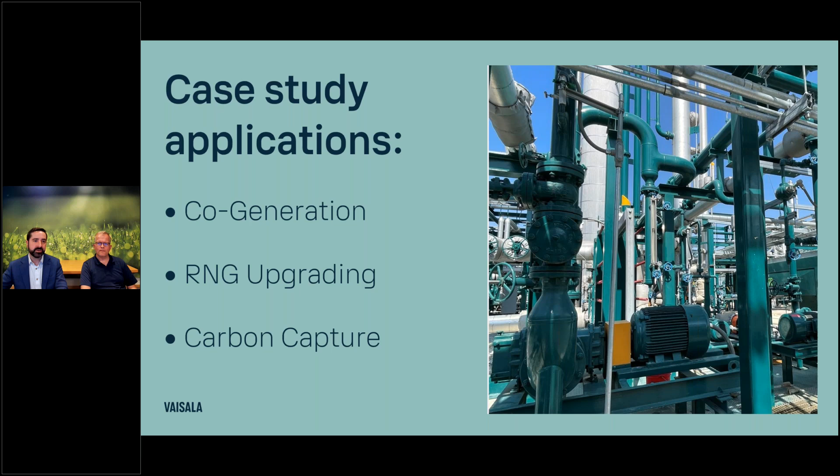But before we get into that, I'd like to introduce Vaisala for some of you who are a little less familiar with us. We began in weather measurement over 85 years ago, and about 50 years ago, we developed the first polymer humidity sensor. Since then, we've been adapting these sensor technologies to a variety of industrial applications, from life science, museum art preservation, HVAC, and we've even been the technology chosen by NASA to help find water on Mars with our low dew point technology. We consistently invest over 10% of all of our revenue in R&D each year to continue to develop products to serve this wide variety of industries, to help protect products, improve processes, and protect personal safety. So next, please.

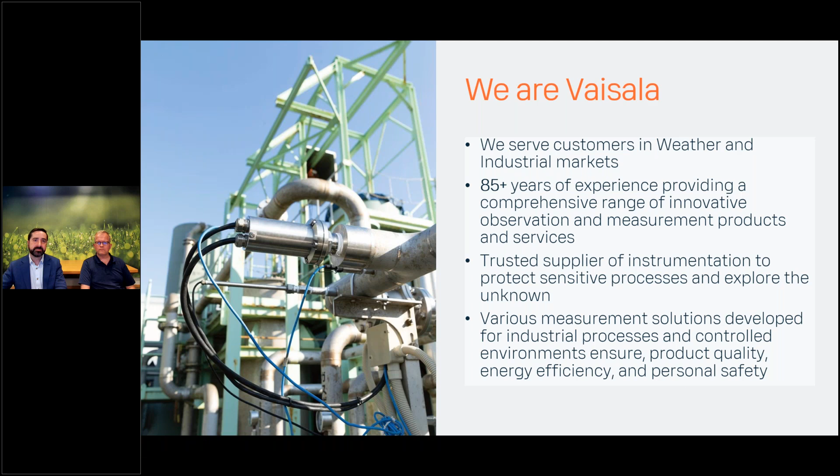And then just a little bit more about ourselves. So I'm an application engineer working in business development for, like I said, the biogas, RNG, and carbon capture applications for Vaisala. Later this month will be my 10-year anniversary with the company, so I'm very proud to be here. My background includes an engineering degree and over 20 years of electrochemical measurement technology experience from a variety of different companies, from other sensor manufacturers to the public sector, working with the EPA. And then I'll let my colleague Antti here introduce himself as well.

Good morning. My name is Antti Heikkilä. I am the product manager at Vaisala for our multi-gas probes product line. That is those infrared probes that we use for monitoring other gases than carbon dioxide. Carbon dioxide is currently the backbone alongside humidity of Vaisala's product range, but all the other instruments, methane included, are in my portfolio. My background is in infrared spectroscopy. I used to work with another company doing mostly emissions monitoring with FTIR technology, and as part of that I have been contributing to different international standards and ASTM test method revision for FTIR spectroscopy and NDIR, such as CO2 standard reference method documents.

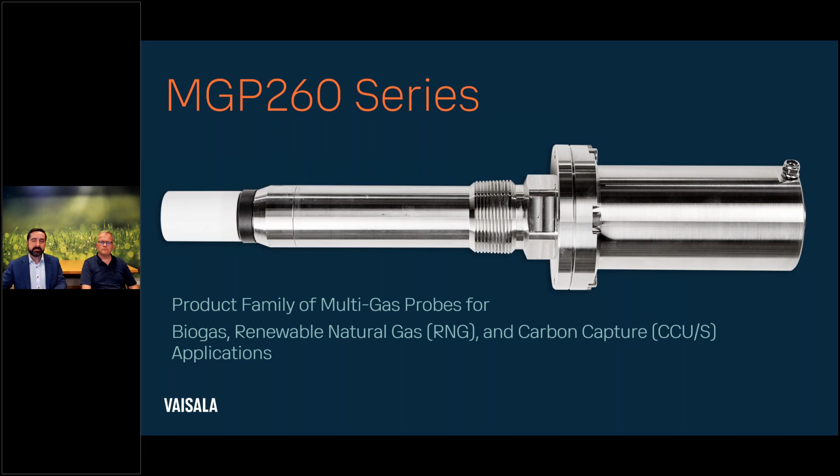The series consists of two models, the MGP 261 and the MGP 262. The 261 being the full-featured, full range for all three parameters that we offer with this probe, with high accuracy and the ranges that are typical for anaerobic digesters and some landfill gas operations. The MGP 262 is a high accuracy, low level methane analyzer combined with a full range CO2 sensor with high accuracy at the higher range for the CO2 measurement. Again, very highly accurate and self-contained.

They are rated Class 1 Div 2 for the United States and ATEX Zone 0 for the European and other markets. They contain three 4 to 20 milliamp loop-powered outputs and Modbus RTU communications, as well as an isolated EX-rated input for a pressure sensor or a temperature sensor, should you choose. Next slide, please.

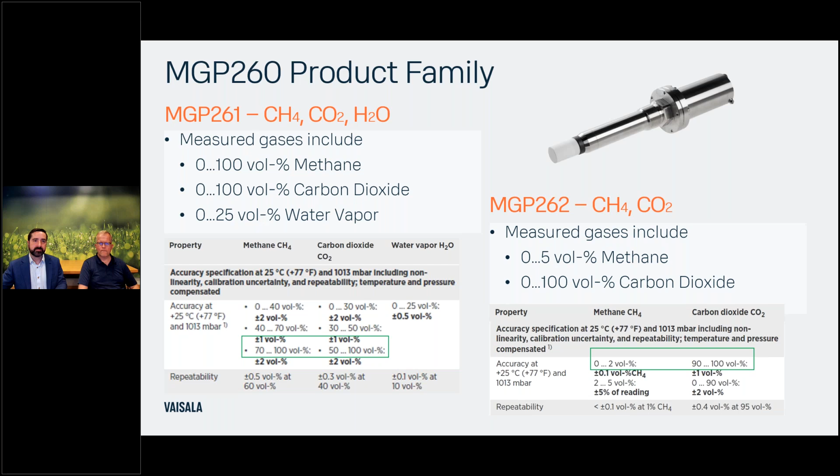The way they work is with our patented CarboCap technology. This is a version of an NDIR sensor that we develop and manufacture here in our own clean rooms. Clean room I actually took a tour of this morning. So very impressive operation here.

What sets these sensors apart from traditional NDIR sensors are two main factors. The first is the light source that we use, which does not dim over time like a traditional NDIR sensor filament bulb would. So the filament bulb dimming is one of the main reasons for drift in an NDIR sensor, and we've all but eliminated the need for frequent calibrations to eliminate the drift from that light source.

The second main thing is the detector itself that we've chosen to use, which is a miniaturized form of a scanning spectrometer. It's a very impressive little piece of technology that scans between the measurement absorption wavelengths of the three gases that we're measuring, as well as a non-absorption wavelength. So effectively creating a zero calibration every 8 seconds within the probe. This eliminates the need for attempting to introduce ambient air into the sensor to kind of assume a zero calibration.

And the sensor elements themselves are protected by a sapphire glass, which makes these highly resistant to most contaminants, and they have been tested with exposure to high levels of H2S with no degrading effects. Yes, we did an accelerated testing with 1 volume %, 10,000 ppm hydrogen sulfide in saturated humidity for 1 year, didn't see any degradation whatsoever. So one can then infer that it would last for at least 10 years in the presence of 1,000 ppm hydrogen sulfide.

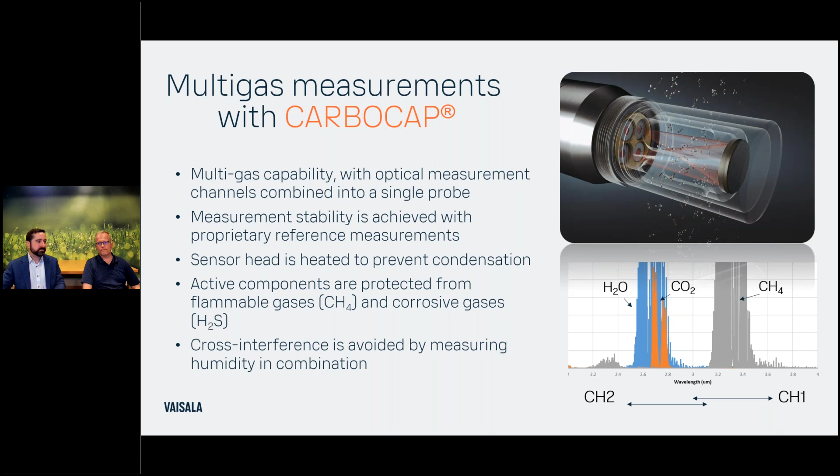So just again, highlighting some of the applications that these probes were designed for: anaerobic digesters, landfill gas upgrading, pre and post treatment. Like Antti said, they're designed to measure in wet gas, so straight off the digester, right out of the landfill. These are very robust instruments that can measure directly inside the process. Combined heat and power engines very much benefit from the fast response time and real-time methane measurement, which we'll talk about in one of these case studies.

And RNG upgrading. The 262 is a very good tail gas monitor, which we'll mention as well. And then in carbon capture applications, measuring in situ, good for point source and direct air capture systems in multiple locations, either in the emission stack themselves or in the captured CO2 streams. They're very versatile, easy to use and integrate into some of these systems, both in research lab grade, as well as some of the pilot plants and scaled up versions that we're starting to see.

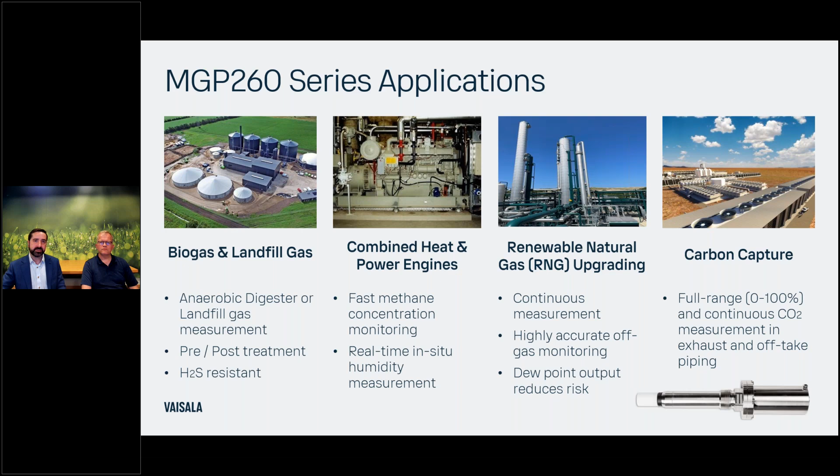So jumping right into the case studies, we're going to begin with one of our earlier cases, which comes to us from our friends in Japan at JFE Environment Technology. This is at the Miura Biomass Center, where they are composting a lot of agricultural and food waste and converting that into biogas to fuel a combined heat and power engine. And so Antti was involved in the development of that project.

And so one of the first questions would be just, what were some of JFE's primary concerns and how did we address those? Their main concern was that they had observed seasonal variation in their methane concentration in the biogas. They are using basically daikon radish as their feedstock. So right after harvest, September, they have a sugar-rich, high methane potential feedstock. And then as winter progresses, the quality of the feedstock goes down.

And at the same time, when it's colder, this is in an exposed location next to the sea, south of Tokyo, they saw a decrease in their methane concentration, increase in their CO2 concentrations, and they had to adjust engines accordingly. And the problem was that when they didn't have an instrument that would give them continuous readings, they were relying on manual testing. So a technician was taking samples with a portable NDIR like once per week, and they were not satisfied with that sampling frequency.

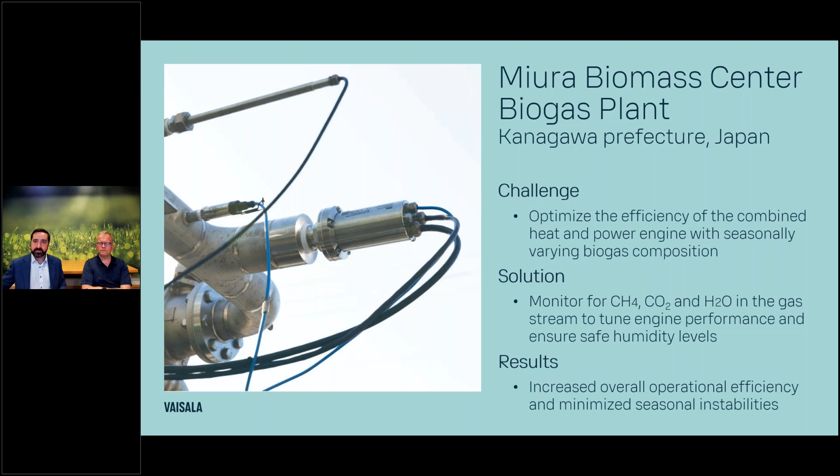Now, that said, we do have a flow-through chamber accessory. So you put the probe into there, and then you have 1/4-inch, say, stainless sampling tubes that you can run as an inlet and an outlet. So we can facilitate remote installations as well. But all right, let's move on to the next case, please.

Which is biogas upgrading, and this is a name that most of you will probably recognize. Pentair is the manufacturer and supplier of RNG upgrading systems that you can install at these plants. And this case comes from the Netherlands at the Sustainable Fuel Plant in Zeeland. And I'll just ask for the next slide too before I forget. So here, Antti, if you would give us a little overview of their type of system and what they needed in terms of measurement from us.

Pentair offer a membrane system for upgrading biogas into RNG. It's a two-stage membrane setup, and they needed instruments for measuring both the incoming biogas and then tail gas, which is mainly CO2. They can also have instruments for measuring calorific value or BTU meters at the point where they transfer RNG into the national grid, but they wanted to control the process better by having online instruments also in the incoming gas stream and in the off-gas stream.

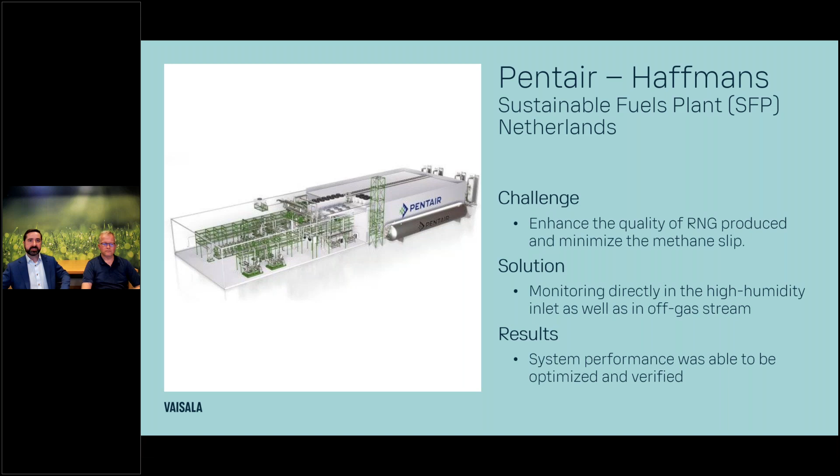So bridging the gap between anaerobic digestion and upgrading systems can be test units. Our distributor in the UK, Bohr Limited, has developed a portable sampling system, essentially, for a probe that doesn't require any sampling systems. That said, it just expands the range of possible applications for this type of sensor, and opens up the possibility for other operations to test it out, see what benefits online continuous quality measurement can have for their operations.

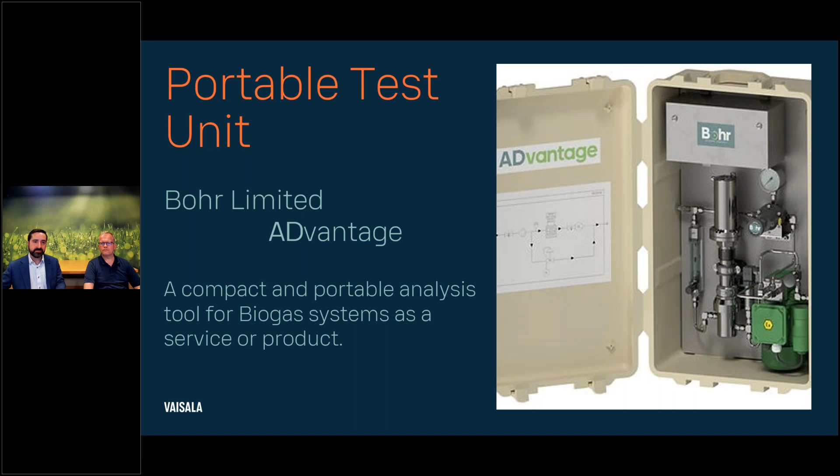So yeah, I said this was for the UK, but let's go to the next slide, and I'll have Antti describe the motivation from Bohr behind this product and how things are going.

Yeah. Well, I see this Advantage product as essentially a commissioning tool for anaerobic digestion plants and CHP engines. While there are plenty of portable options for doing spot tests, the reason for engineering something like this is that you can leave this running on the site for, say, 3 days or a week, just like it was an in situ continuous monitoring probe, but you don't need those 1.5 inch sampling ports for inserting a probe. You can just take the gas from a 1/4 inch fitting that's typically readily available, and the data is stored inside the Advantage system in its internal data logger.

It can also put that data, for instance, into Bohr's cloud-based service. So for somebody who would set up and commission a new CHP engine installation, or a new upgrading system, this would be something they could take from site to site and leave running 24/7 for as long as the commissioning lasts.

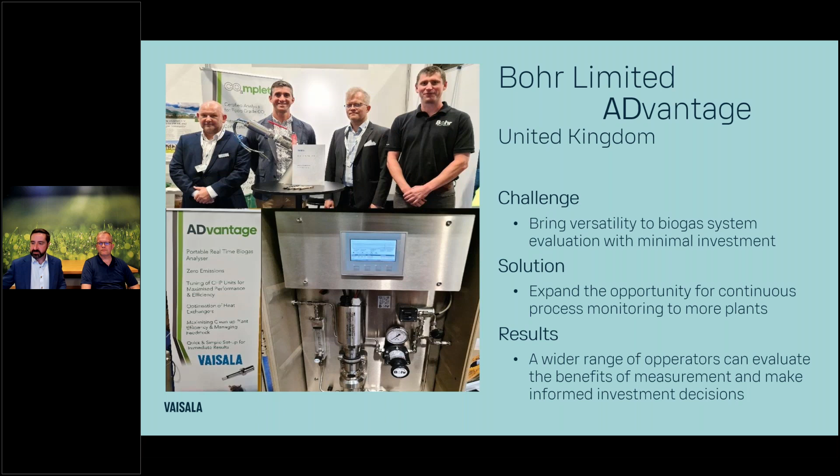Yeah, excellent. It's super versatile, and it really doesn't matter what the application is. It can be digesters, upgrading plants, and even carbon capture applications. All right, let's get through to the next one here, if you don't mind.

Speaking of carbon capture, this is one of our first carbon capture applications, in Copenhagen, Denmark. The Amager waste incinerator plant is a waste-to-energy plant outside the town, in partnership with the Technical University of Denmark. Yes.

What they were doing here is somewhat of a pilot plant where they tested, I think, over a dozen or 13 different carbon capture system configurations to find out what would work best for waste incineration. With natural gas plants, biogas or RNG upgrading systems, and other point source carbon capture applications, those processes are more well known. Waste incineration is a little less experimented with, so these people were really striving to find out the financial viability of that type of application. Next slide, please.

Yep, it's been operating for quite some time, and here's a picture of one of their test units. I'll let Antti take it from here with more detail about what they needed from us. Yep. This system was engineered by DTU in conjunction with Danish Carbon Dioxide Union, which is actually a branch of Pentair. So this was also a collaboration with Pentair, and what they are doing is a water wash scrubber for dissolving CO2 from the flue gas and then releasing it in a flash column from water, which is then recirculated into the stripper column.

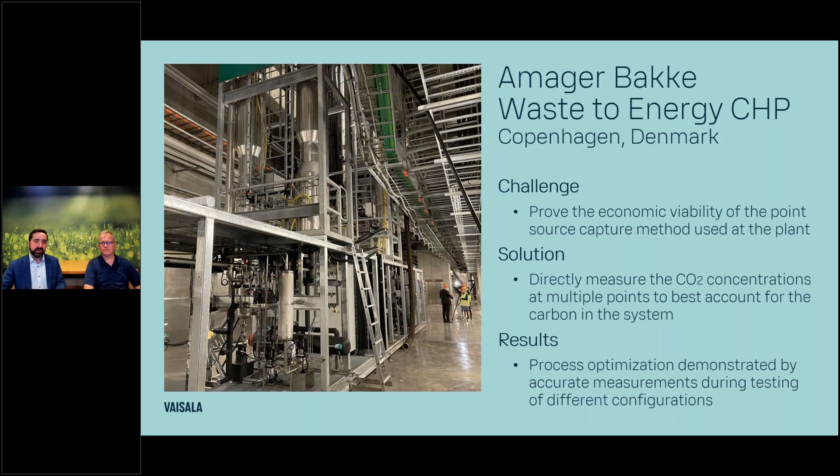Moving on to the next slide, we'll talk a little about one of the utilization cases for carbon capture. One of the larger CO2 emitting industries in the world is concrete manufacturing. I believe it accounts for about 8% of all global emissions. And I think it's almost 1-to-1, tons of concrete produced to tons of CO2 produced. Yes. Don't quote me on that, but it's equal.

And so there's a lot of scrutiny going into this. Yeah, that's especially in manufacturing of Portland cement, from which concrete is made. So in the clinkering process, you release carbon dioxide from limestone itself, and then as you need very high process heat, you can't do that with electricity, so you need to burn something. And when you burn that something, it might be coal or pet coke or waste materials, you have large CO2 emissions.

And you can't avoid that, because part of the CO2 released from the mineral is inevitable, and also since the temperatures involved are so high, you need a combustion process. So that's a hard to abate industry, one that really benefits from having post-combustion carbon capture, removing the CO2 so that you are not letting it escape into the atmosphere. Yeah, and then we have to do something with it. So next slide, please.

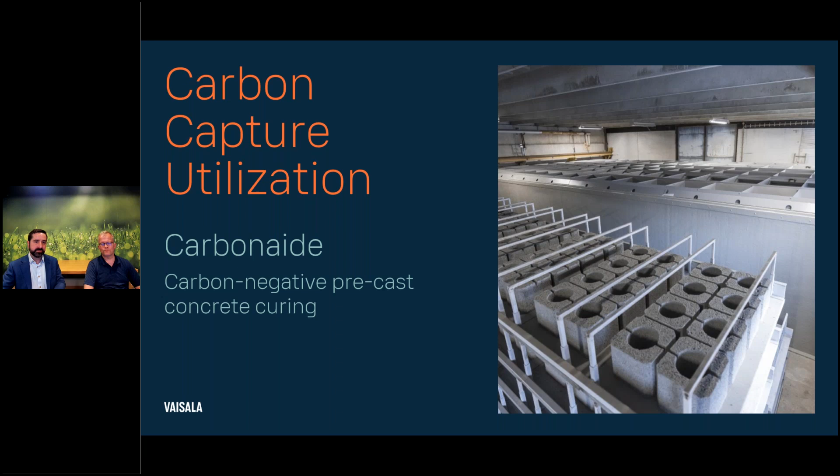So bringing this into a little bit more of a circular economy of cement and concrete production. In precast cement production, like these cinder blocks and things like that, the CO2 can be supplied to the curing concrete, which will absorb the CO2. So there'll be special curing chambers, and Carbonaide has developed a specific version of that. So if you would bring it to the measurements and what's needed in that type of operation. Yep.

In this case, the precast concrete elements are cured in chambers that are roughly the size of a shipping container, and they need inline CO2 analyzers in the ducts leading in and out of those chambers, so that they can track how much CO2 has been bound into the concrete. So the requirement is for a simple low maintenance CO2 transmitter that can be installed directly on the duct, and it needs to react fairly quickly, because when they change the flow rates, we see a kind of a pulse in the CO2 trend. So having a direct reading instrument instead of a sampling system is an advantage.

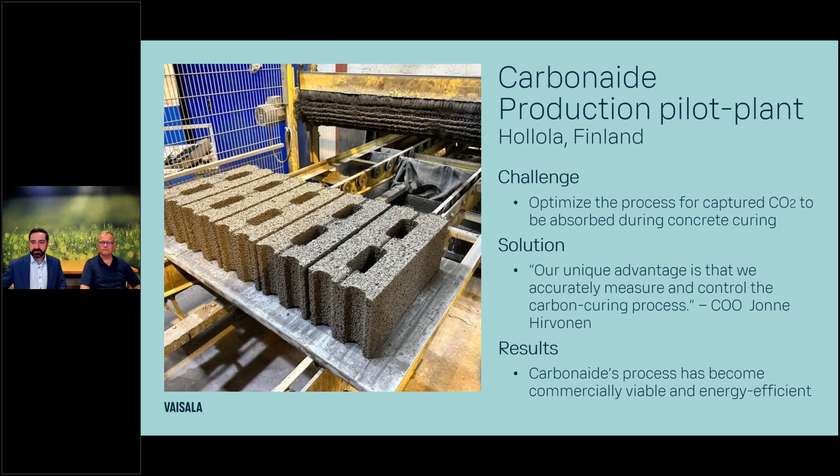Just wrapping up the discussion, I just wanted to highlight some of the benefits to end users here. For these MGP 260 series probes, it is a low cost, low maintenance, low total cost of ownership, simple to install, reliable, continuous measurement of some of the more critical parameters for these applications. They are uniquely corrosion resistant. The world's first humidity measurement in the presence of H2S is a risk management type of measurement. So you can protect your CHP from high levels of humidity and your membranes from potential condensation before compression and injection into the membranes.

We have, again, no sampling lines, sampling systems. You don't need sample conditioning, and no calibration bottles connected to these systems. We do recommend the annual check, just for sanity. That can be done in the field. We have an easy PC software interface that we're quite happy with, that makes configuration of these things very easy.

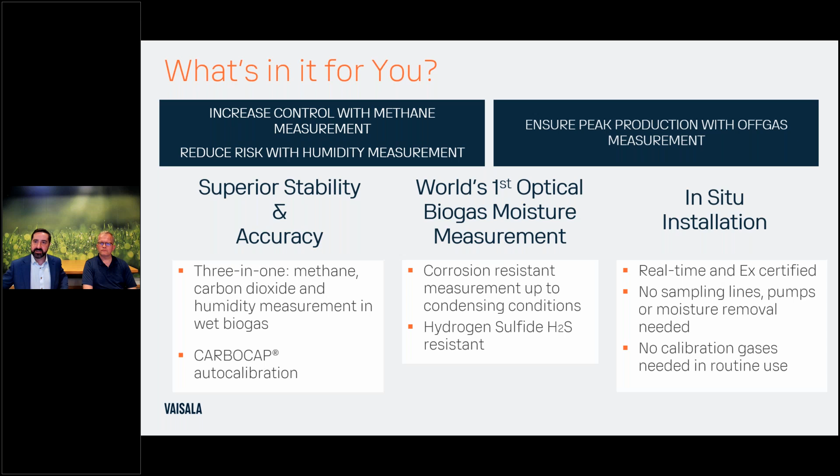So thank you for that. We'll move to the next thank you slide here, and we'll get into some of the questions that we've received during the presentation, which we have a few. Oh yes, there are a few new questions. Which is great. So let me pull this so we can read them easily.

And part two to the one question about the pipe diameter is a popular question that we've gotten a few times here, which is the adherence to the biogas regulatory reform rule, the EPA's so-called GC rule for the renewable fuels standard measurement, and the alternative measurement protocol submissions.

So we have submitted our AMP. It is in process with the backlog of a number of our competitors. There is an AMP website that you can check, and you can see our submission on there. We are anxiously waiting for approval on that, but actually, you know what, I'll let you describe what we went through as far as testing and what some of the results were on that.

So in order to sufficiently document our claim that the MGP gives comparable or better accuracy than a GC, we ran comparison tests, as we have our own extensive R&D laboratory where we happen to also have gas chromatography instruments. We did parallel testing between 2 MGPs and 2 runs of the GC.